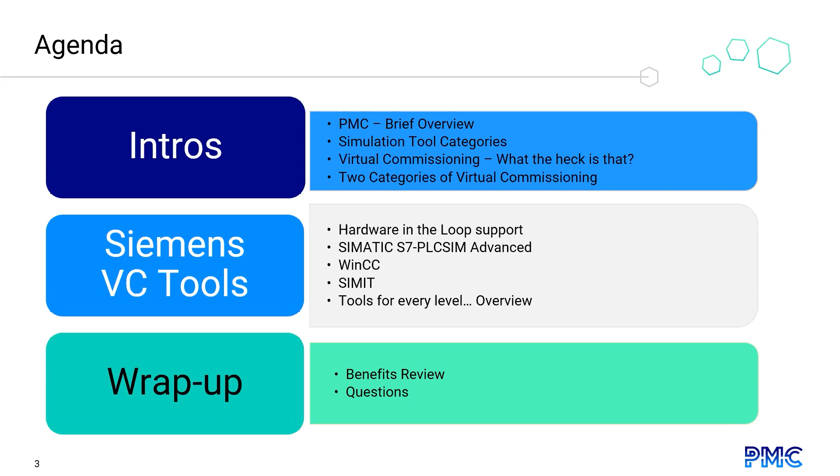Today's session will focus on, I missed a slide, I'm sorry.

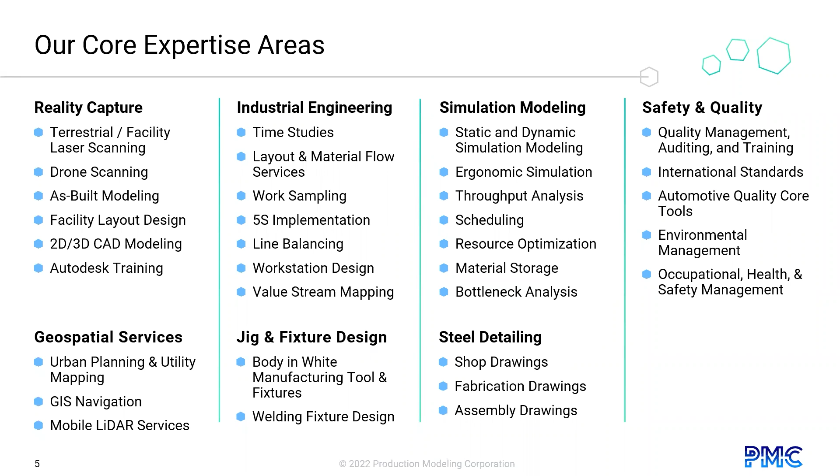Okay, simulation tools fall into several categories. Since people are often unaware of the differences among the tools or even the existence of any of them, we'll briefly explain the major categories. Note that not all simulation tools offer virtual commissioning capabilities, but it's useful to know what simulation tools are available that may help you to improve your processes.

Discrete event tools like Plant Simulation, Simul8, and AutoMod let you analyze the operation of a line, entire departments, or a whole facility. It's a perfect tool to identify bottlenecks and play what-if games to eliminate them. You can optimize overall items like throughput, buffer or inventory sizes, scheduling, and workers. A discrete event simulation is often referred to as throughput simulation.

Oh, by the way, our animated title screen for this webinar showed Plant Simulation in action. You may have noticed that, like the Process Simulate Robotics video that will be coming up. This is a body shop. The difference there is that Plant Sim was doing what it does best, simulating entire lines, departments, or entire plants. At this level of detail, every single action of a work cell does not have to be modeled. It can be simplified, but the total cycle time must match.

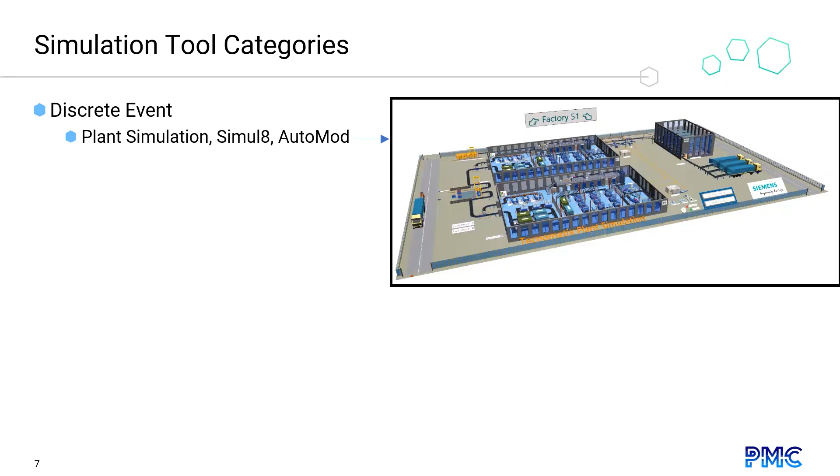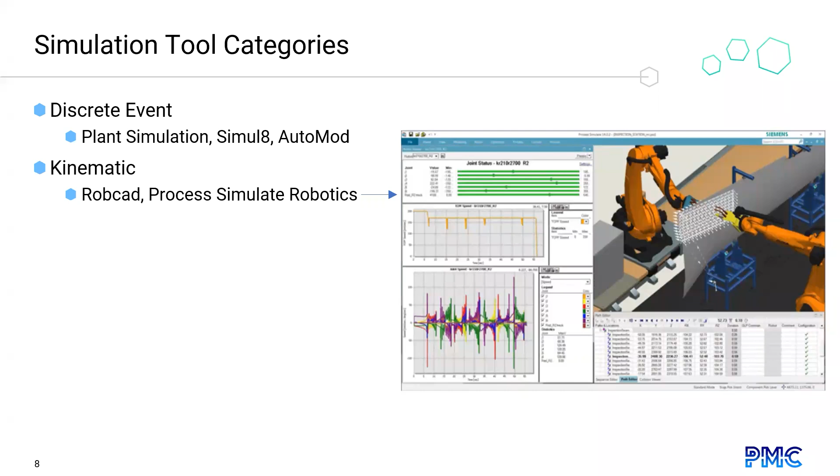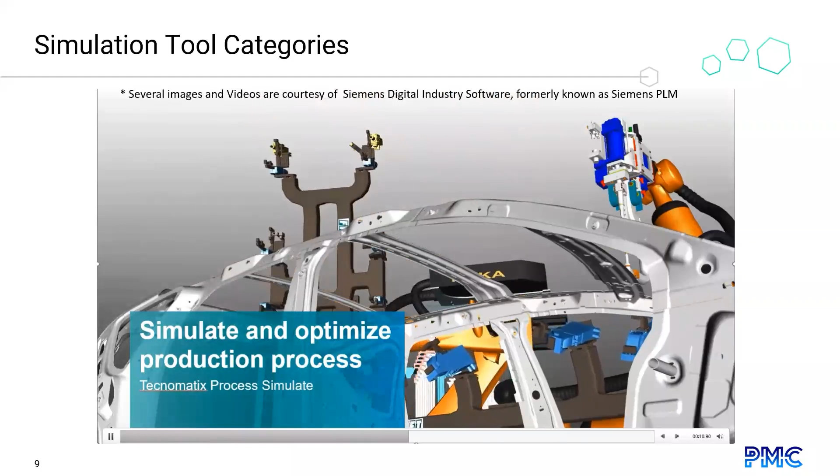Kinematic tools like Siemens Tecnomatix RobCAD and Process Simulate Robotics let you perform offline programming, online programming, analyze the real-time motion of robotic work cells, optimize cycle times, optimize welding sequences, and increase process quality. The next slide shows Process Simulate modeling robotic stations in an automotive body shop. Note that Process Simulate Robotics models down to the finest level of detail. That is why it is perfect for modeling individual work cells where this level of detail is required.

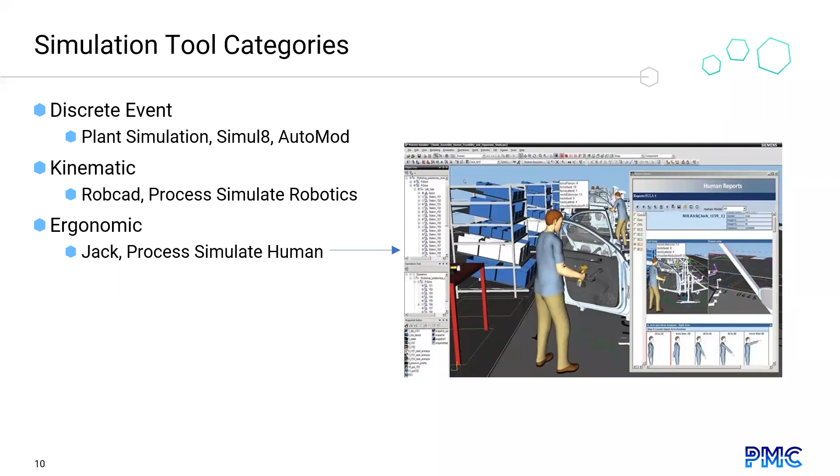All righty, now we've come to ergonomic tools like Jack and Process Simulate Human, which let you analyze human motion and optimize the ergonomics of human operation to enhance worker efficiency and minimize injuries. Note that the focus here is on the actual motions that a worker makes in order to complete a task.

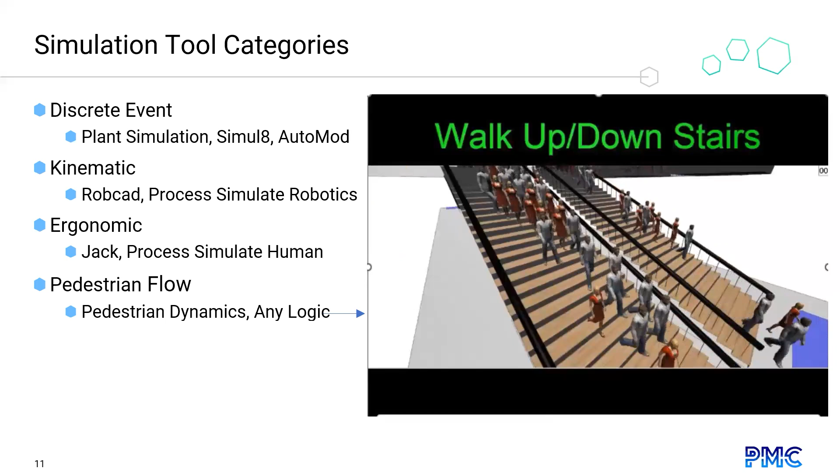Pedestrian flow tools like Pedestrian Dynamics and AnyLogic model the behavior of people moving on sidewalks, stairs, and escalators, etc., in stores, stadiums, airports, etc., in normal and evacuation scenarios. The pedestrians are aware of others, alternative pathways, and obstacles around them. Like in the real world, their behavior is random, including walking at different speeds, going around obstacles in different ways, passing each other, etc.

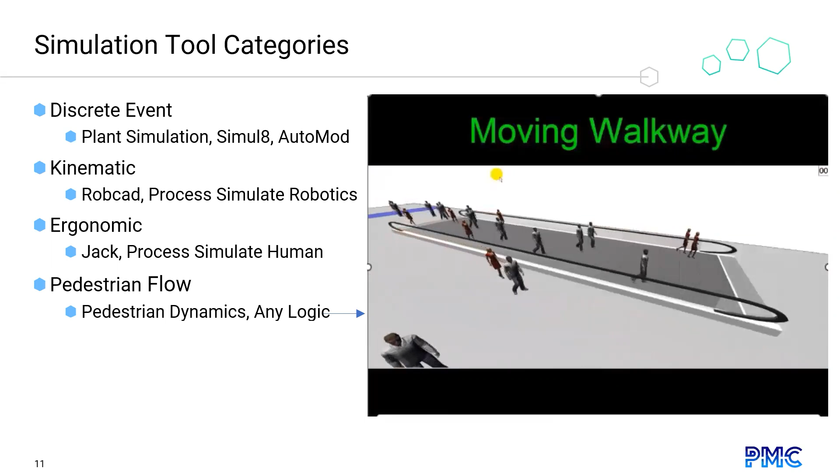Computer-aided engineering tools like NX CAE have a suite of tools like Simcenter that let you analyze specialized items like thermal and flow analysis and finite element analysis earlier in the design process. There are numerous features here like designing flexible wiring harnesses, additive manufacturing products, and acoustic simulations. You can even hear the simulated sound of a machine running that you've changed, and Mechatronics Concept Designer for machine design. This results in better performing products and machines.

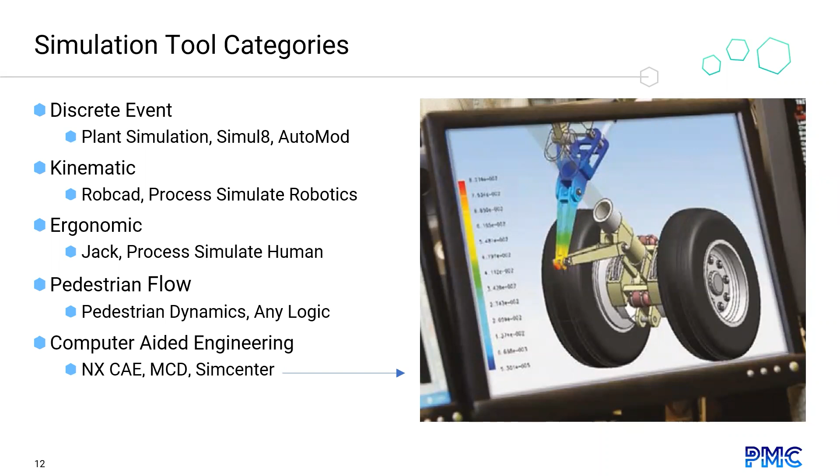Computer-aided manufacturing tools like NX CAM let you analyze specialized items like tool design, NC programming, feature-based machining, and collision detection. This automates the development of molds, dies, and fixtures for higher quality, lower cost, and faster turnaround for machining.

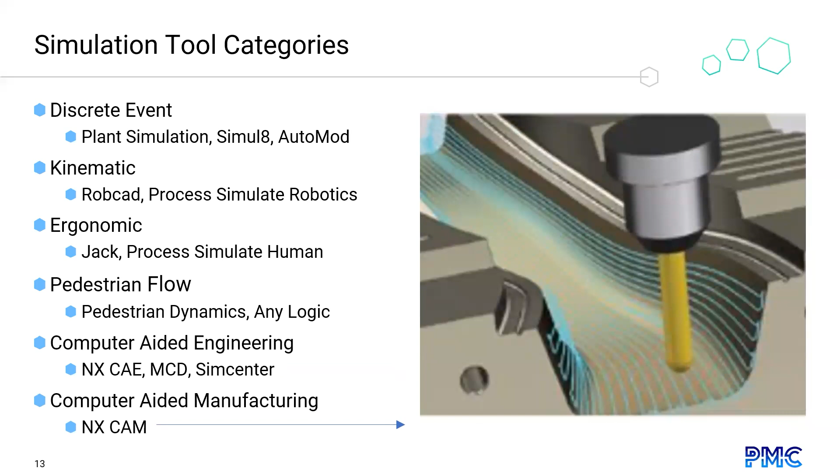Just in case you have never heard the term virtual commissioning before, our next topic will let you know what in the world virtual commissioning is. Setup and ramp up of the control systems implementation for robotics and automation is called commissioning. Traditionally, this step is done after the physical system is built on the shop floor before job one.

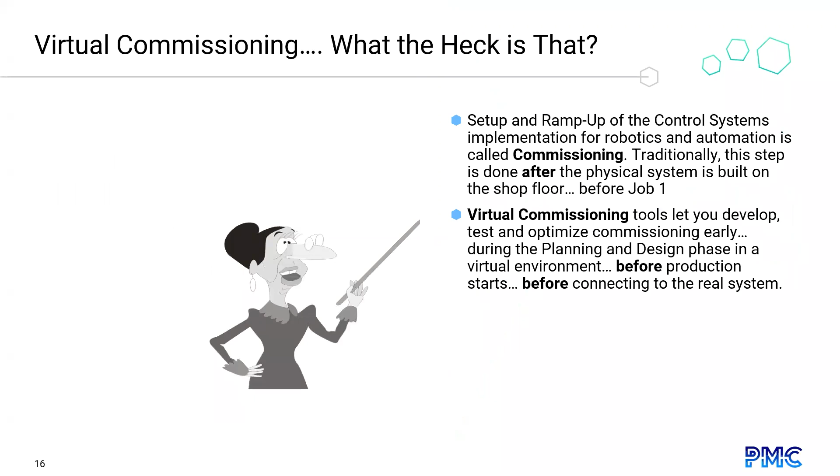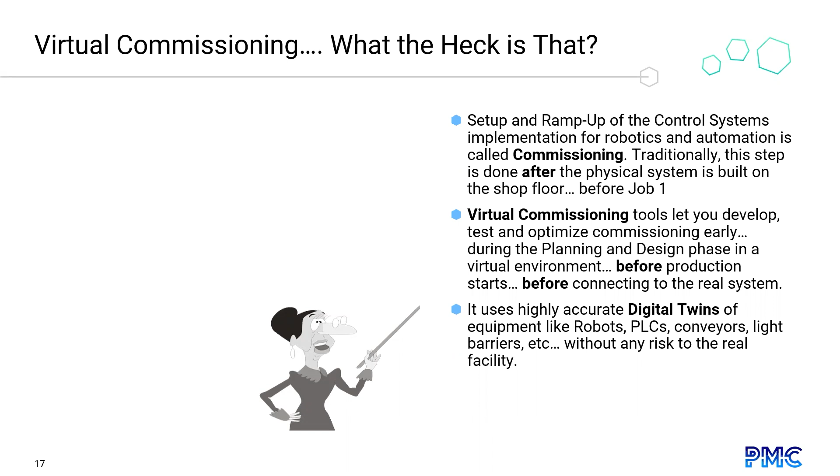Virtual commissioning tools let you develop, test, and optimize commissioning early during the planning and design phase in a virtual environment, before production starts, before connecting to the real system. It uses highly accurate digital twins of equipment like robots, PLCs, conveyors, light barriers, etc., without any risk to the real facility. There are two major types of virtual commissioning.

For software in the loop, a simulation model interacts with a digital twin of hardware like a PLC. This lets the simulation model interact with the exact same programming and behaviors in the real world before equipment is installed in the plant. For hardware in the loop, a simulation model interacts with the actual PLCs, again, before they have been installed. Both types ensure that the control logic used by the model is the same as in the real world. This avoids the problem of a model using different control logic programming.

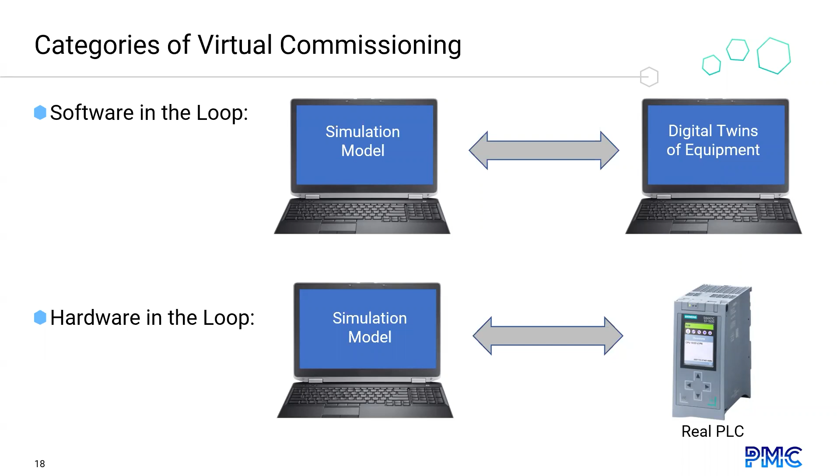The problem of a model using different control logic programming can vary from the model still accurately matching the throughput of the real world to being so far off that wrong, very expensive decisions could be made based on the model. The biggest headache for nerds like me who enjoy building simulation models full of custom programming is that the model might have some garbage in it that could result in much bigger garbage out of it. That's why no matter if you use virtual commissioning or not, you should make sure that the control logic in the simulation matches that of the real world.

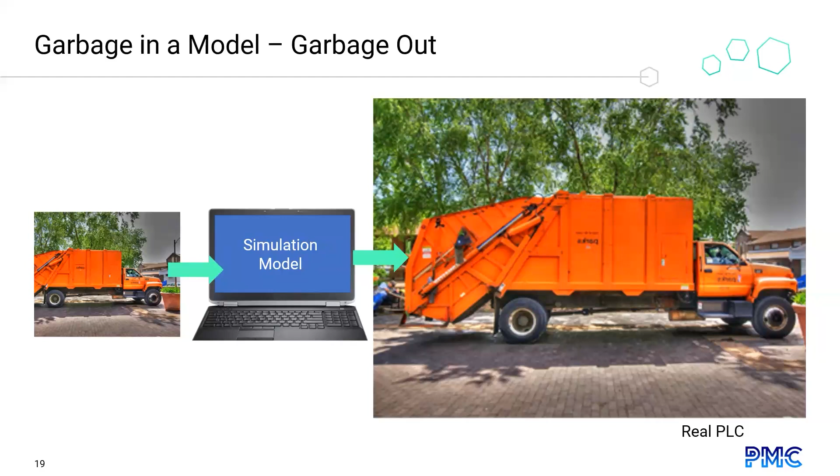A few years back, my first virtual commissioning client had this very problem in the past, which was not discovered until the plant was built, and it didn't meet the throughput goals that the model indicated could be met. You guessed it. The problem was that the model did not match the same control logic as the PLCs. So they wanted to make sure that they didn't get burned again. And some problems were discovered before they actually set the system up. Most of them were okay though.

Our next topic discusses the powerful suite of virtual commissioning tools available from Siemens. It is easy to get them confused with one another. Siemens tools provide hardware-in-the-loop virtual commissioning through more than one PLC controller communications protocol. For example, Tecnomatix Plant Simulation can communicate directly to controllers via the OPC Classic or OPC UA protocols.

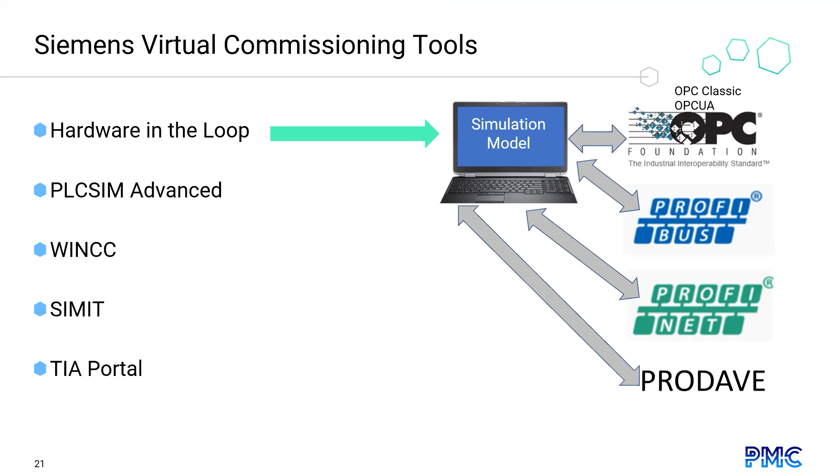PLCSIM Advanced is a very powerful digital twin of an S7-1500 hardware controller that provides software in the loop virtual commissioning. Note that several instances of PLCSIM Advanced can be made on your computer to provide digital twins of more than one controller.

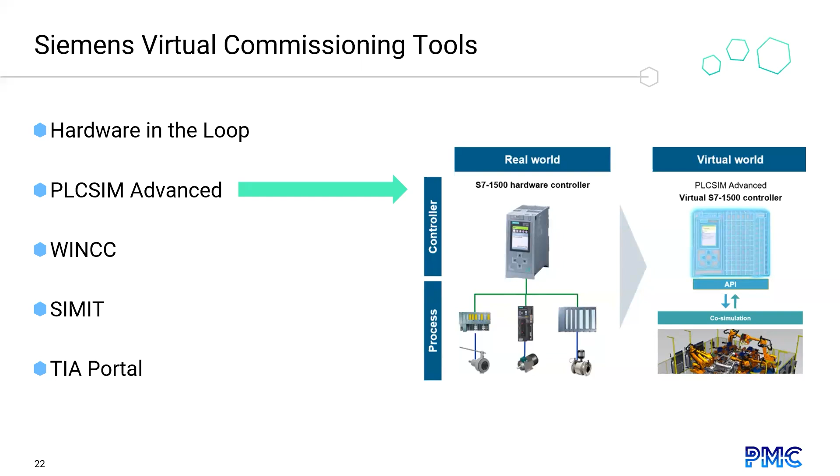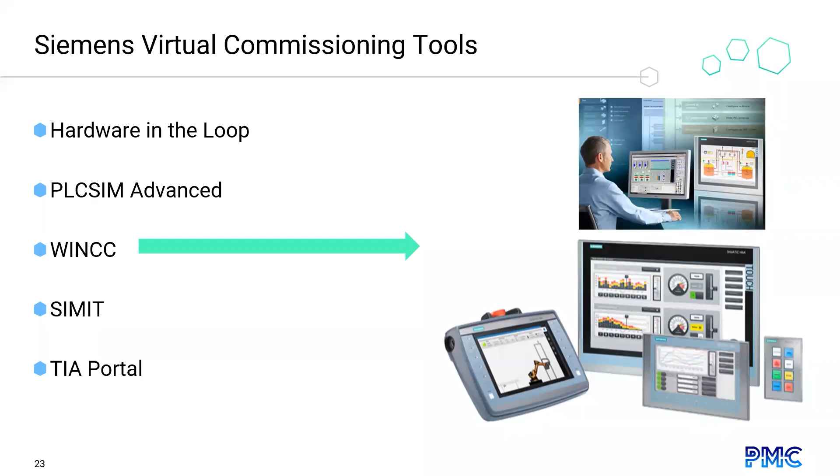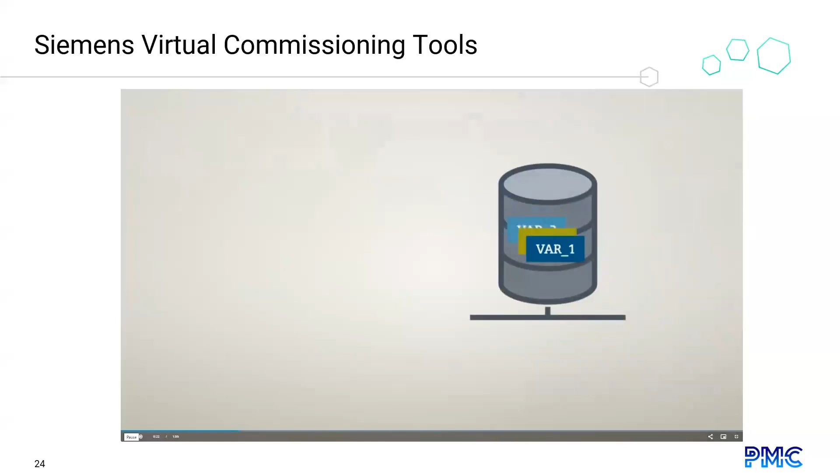WinCC has great user-friendly tools for the configuration of SIMATIC HMI operator panels with a real life or a virtual controller. We have another video that shows you what this cool tool can do. Notice they're just dragging and dropping all these built-in items or custom items. Really nice if you've got some application for it.

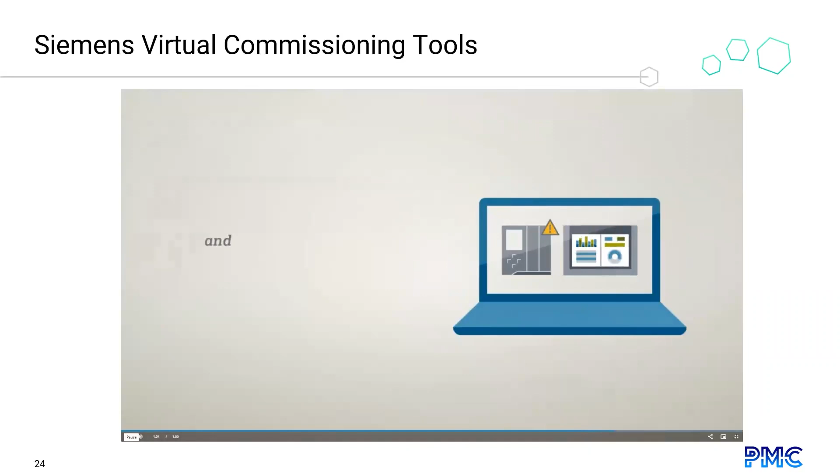One thing I really like about that video is it highlighted a lot of the benefits of any type of virtual commissioning.

Simit is a simulation platform capable of comprehensive automation, project testing, and process commissioning all in one platform. It can also be used as a training tool to teach operators and maintainers how to efficiently run their plant. Simit can communicate with hardware, PLC Sim Advanced, NX MCD, Process Simulate, and Plant Simulation.

Simit has several libraries of components that can be dragged and dropped. For example, the FlowNet library can simulate pipe systems, pressure and temperature of gases, liquids, etc. And the drives library provides components for simulating drives.

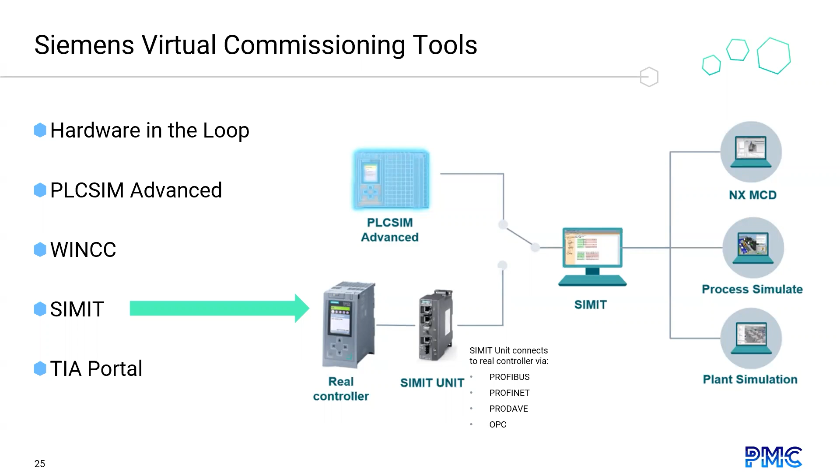Note, Simit lets you easily switch between software in the loop commissioning using PLC Sim Advanced, and hardware in the loop using Simit units.

The TIA, Totally Integrated Automation Portal, reminds me of a shopping mall that carries nearly everything. TIA brings nearly everything except the kitchen sink in one interface, from digital planning to integrated engineering and transparent operations, including simulation tools. From field level right on up to the cloud, the TIA portal seamlessly connects a comprehensive array of hardware, software, and services tools in several categories. It's an open system architecture that allows integration of new technologies. The end-to-end consistency reduces expenditures, saves time, and enables the step into the next dimension on the path to the digital enterprise, with room for future innovations.

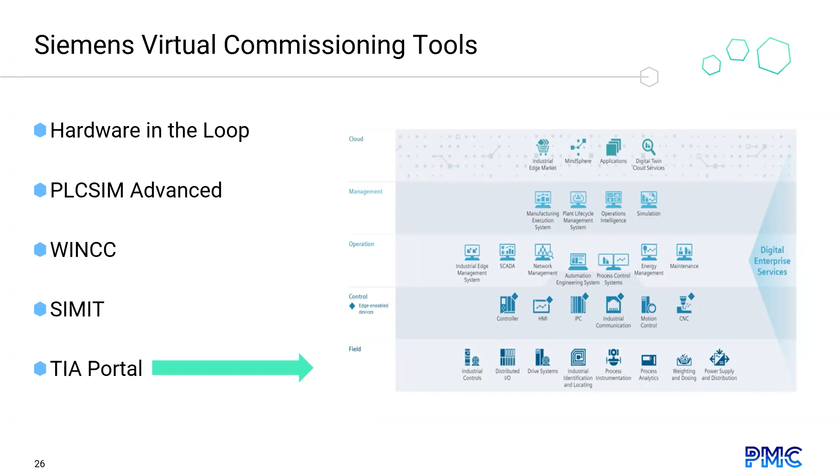Before we go down to the next level, let's look at a short video courtesy of Siemens showing material handling in a warehouse, including an automated storage and retrieval system, conveyors, robots, and AGVs. Virtual commissioning uses PLC Sim Advanced to check the actual PLC code here.

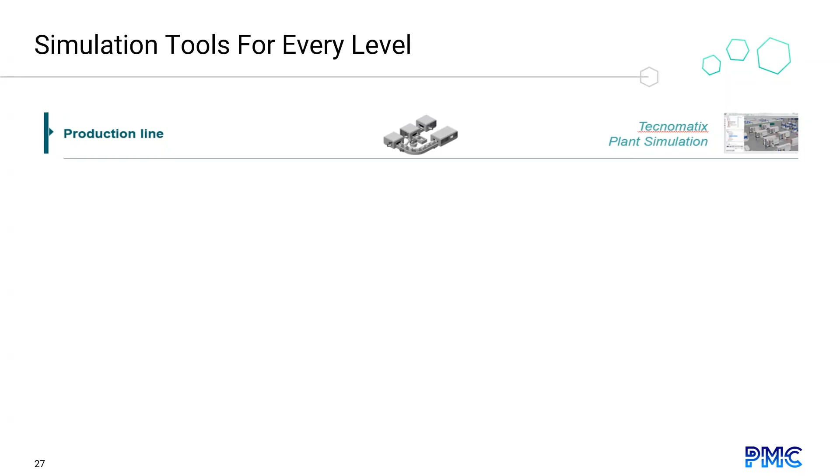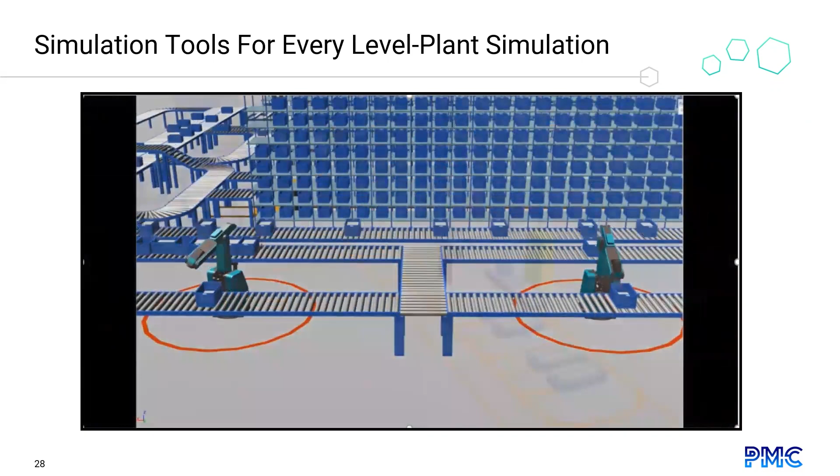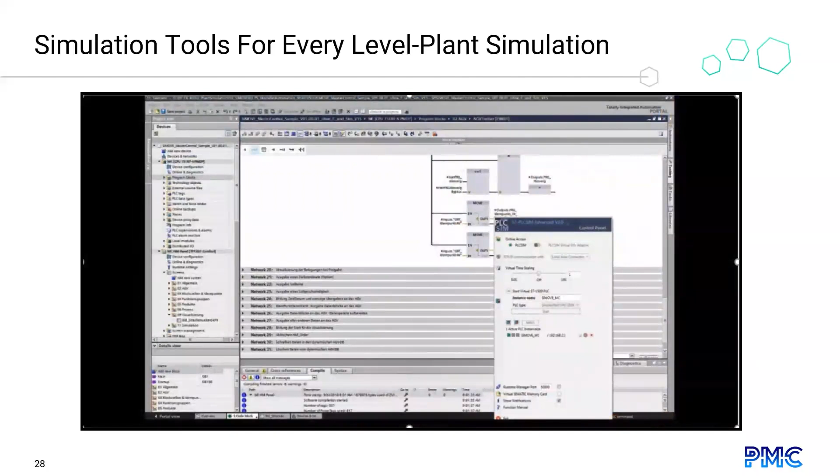You can see PlantSim lets you visualize warehouse storage racks in 3D and easily change the display of conveyors into several different types, like belt and roller conveyors. PlantSim's AGVs can follow tracks like those you see here, or you can program AGVs to move from one simple marker to another without even having to lay out any tracks. And finally, you can test the simulation with PLC Sim Advanced.

Now that we've used Plant Simulation to check material flow in a warehouse using virtual commissioning, let's move down one level: simulating robotic cells with Tecnomatix Process Simulate. You already saw a bit of Process Simulate robotics. We have a 2-minute video that shows more details.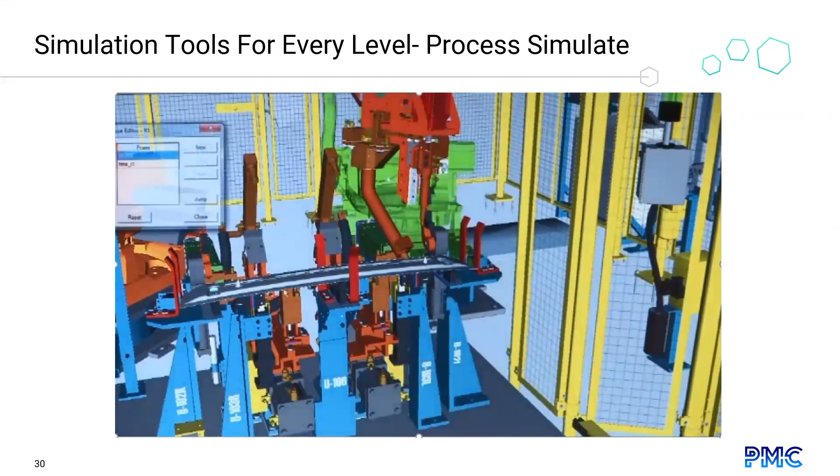Process Simulate enables engineers to use a 3D environment to design equipment and refine manufacturing processes. Evaluating multiple iterations and problem solving are performed in the office rather than on the shop floor, so engineers can be confident that their designs will meet functional and performance requirements before implementation.

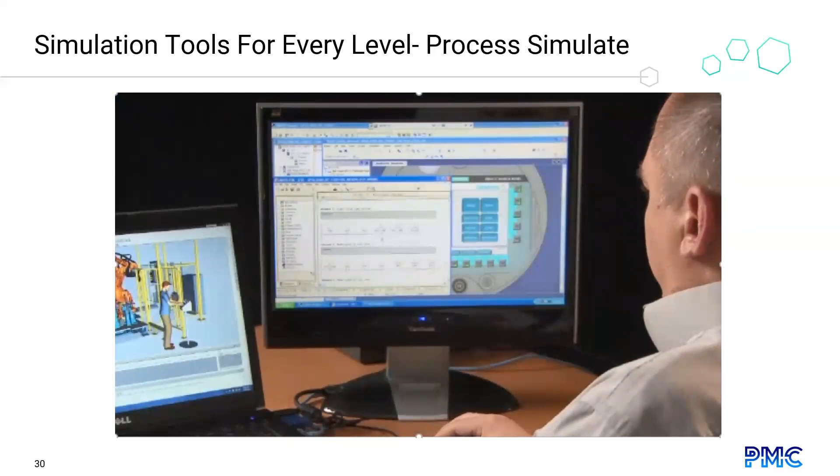Siemens offers an integrated environment that allows critical collaboration between engineering disciplines. Manufacturing engineers working in Process Simulate can share information with controls engineers who are developing Step 7 control logic and HMI design in Siemens TIA Portal, a state-of-the-art software technology unifying all automation software tools in a single development environment.

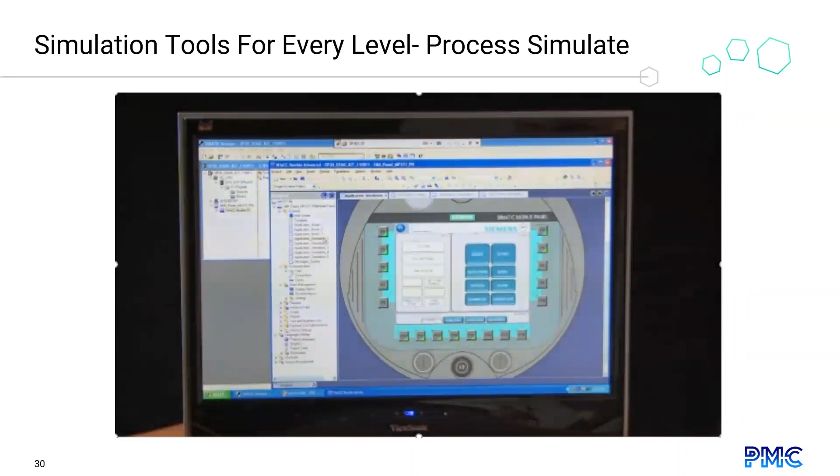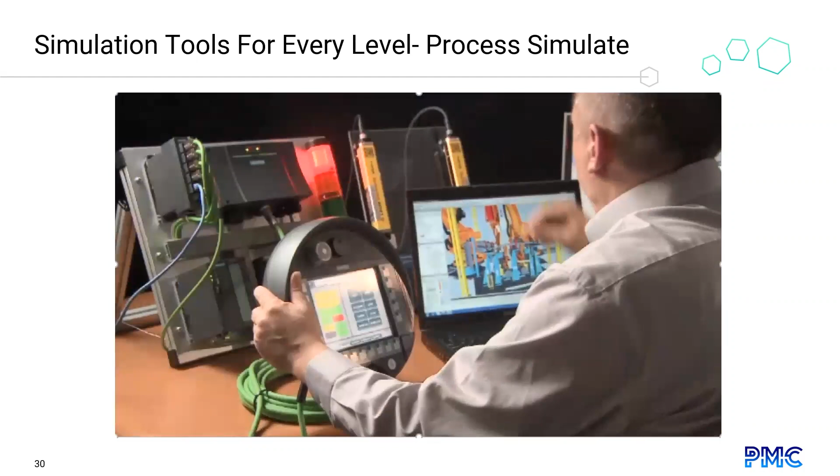Using Process Simulate for robotics and commissioning, engineers can validate their logic, test mechanical sequences and safety interlocks, and run other system diagnostics. Flexible automation systems often include the use of robotics. Control of these robots must be fully integrated with automation control in the system, and the logic in both the robot programs and PLC must be validated to ensure proper function. These steps are easily accomplished using Process Simulate.

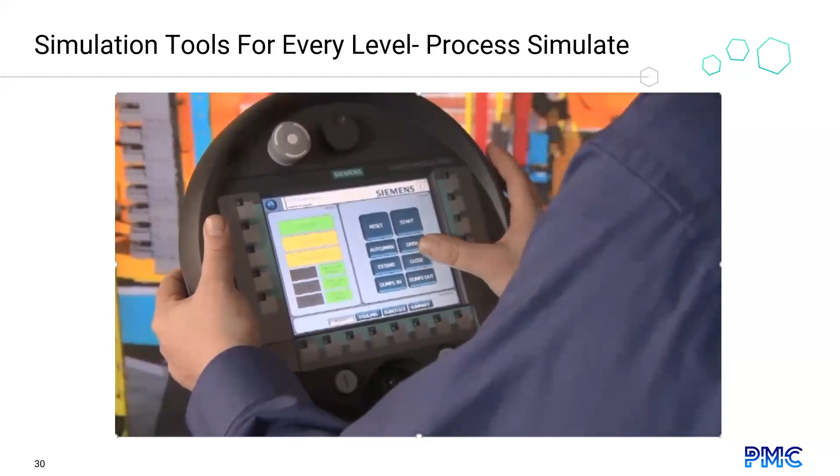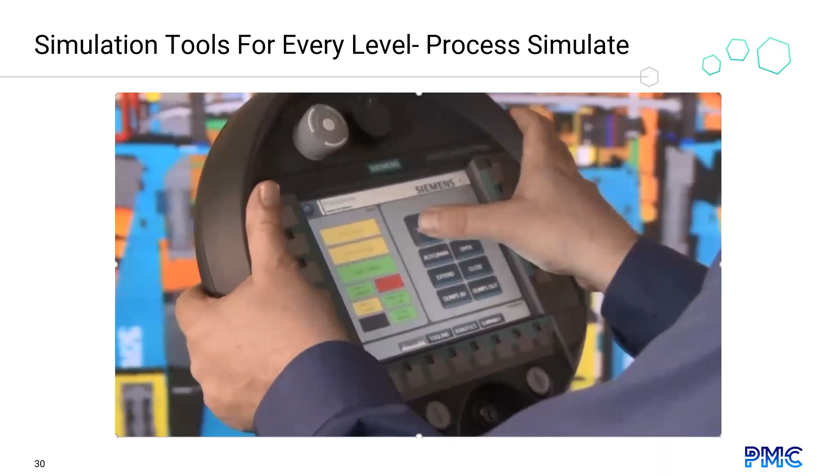At the appropriate point in the development lifecycle, operators from the shop floor can be brought into a hybrid commissioning environment for system training. Here, we utilize appropriate amounts of hardware in the virtual environment, so operators can become familiar with both the automation and processes. This step helps reduce errors that would normally have to be corrected during ramp-up. With innovative technology offered by Siemens, companies can confidently get the right product to market at the right time.

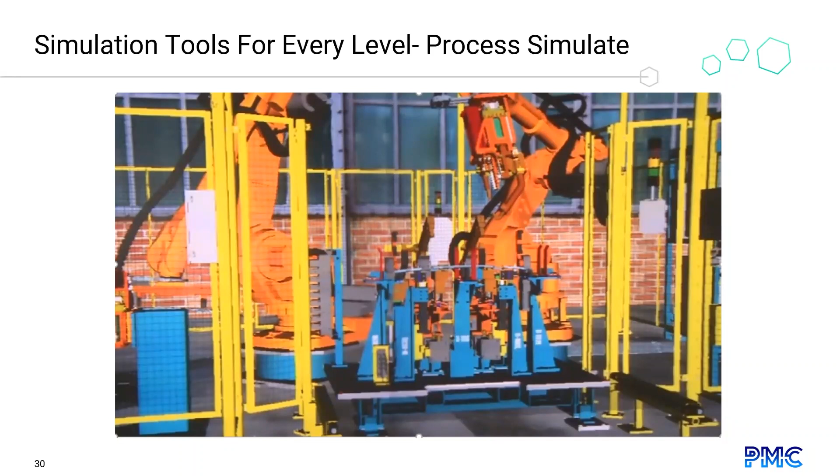I hope that gave you a good idea of what a cool tool that is, along with Plant Simulation. You might have noticed that the engineer there used both a virtual control panel, an HMI control panel, and a real piece of hardware that was interacting with the software simulation of this whole thing. So it's really nice stuff if you have an application for it.

Now, NX Mechatronics Concept Designer, which models production machines, is another really cool tool. A functional model provides a common language for mechanical, electrical, and automation disciplines to work together in parallel. MCD allows you not only to see what it looks like, but validate that it works before you build it.

This is enabled by the reuse library, from which you can quickly add data to the functional model. This data includes joints, motions, sensors, actuators, collision behavior, and other kinematic and dynamic properties for each component. This allows a physics-based interactive simulation to verify machine operation.

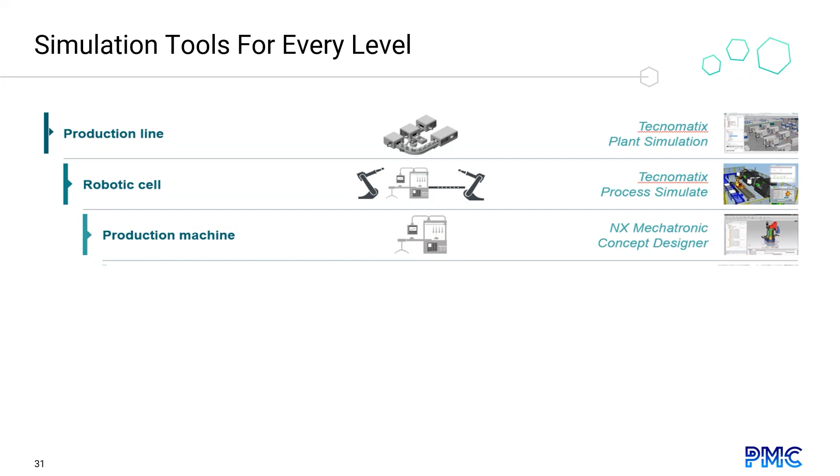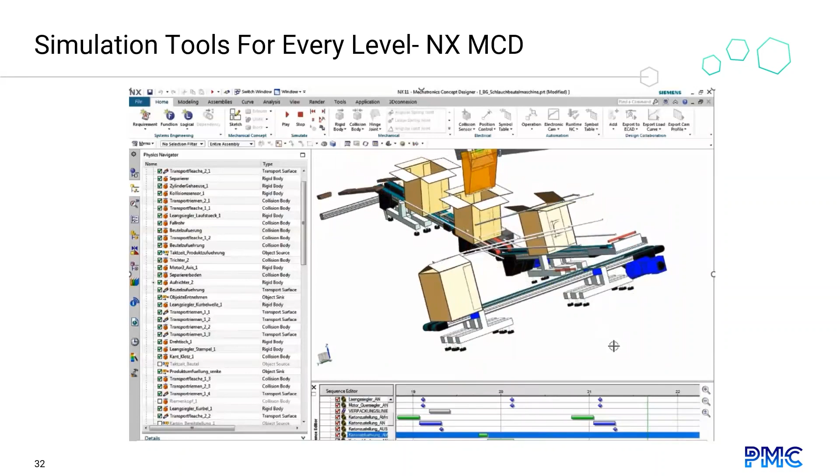Okay, now for component physics, Simcenter Amesim lets you virtually assess and optimize the performance of mechatronic systems. It combines ready-to-use multi-physics libraries with the application and industry-oriented solutions that are supported by powerful platform capabilities to let you rapidly create models and accurately perform analysis.

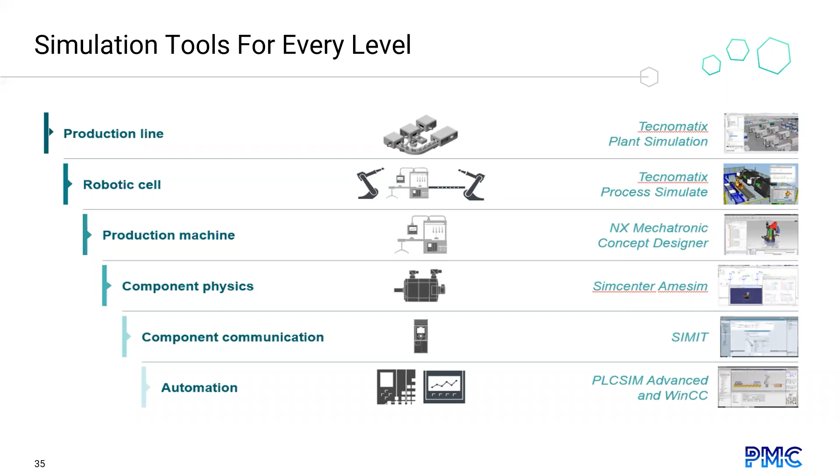Down at the component communications level, we have SIMIT's ability to communicate with controllers. And finally, at the lowest level, we have PLCSIM Advanced and WinCC, where PLCSIM Advanced is a digital twin of the controller, and WinCC is a digital twin of the operator's panel.